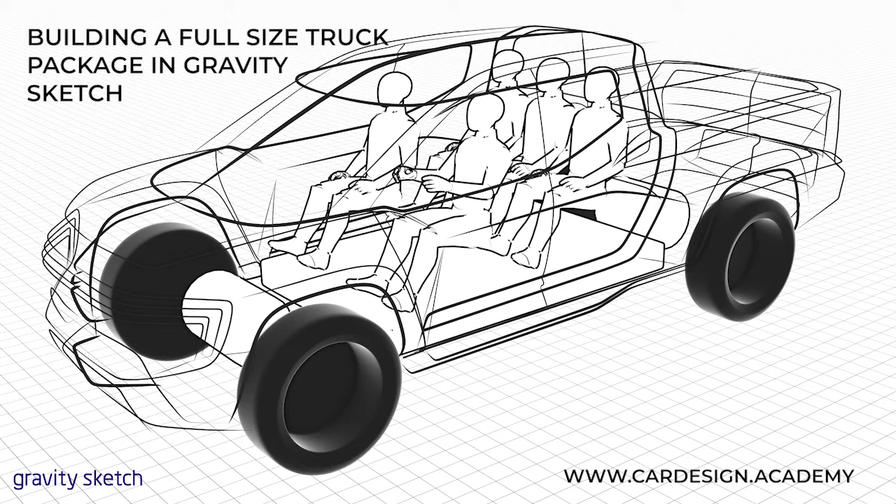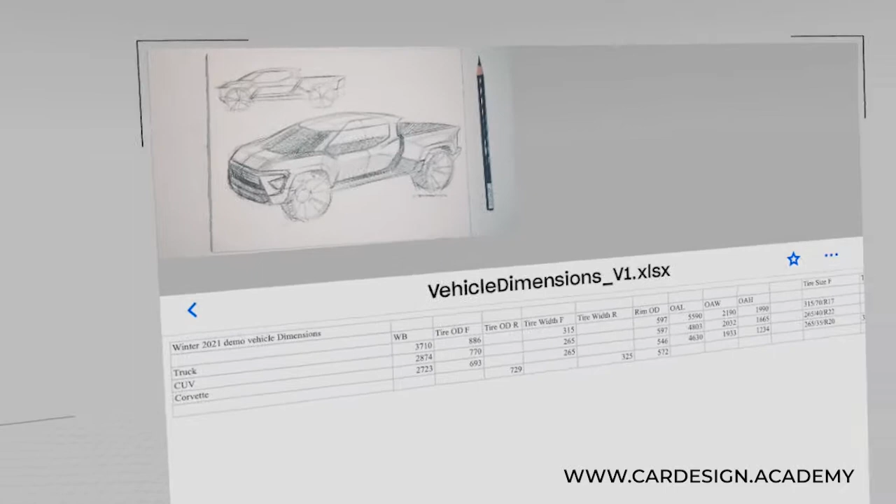In this one, I'm going to be doing this high H-point pickup truck. So what does high H-point mean? H-point is the hip point of the occupant. So for something like a sports car, you have a very low H-point, and for something like a truck, you tend to have a very high H-point. That has a lot of implications into how the occupant is positioned, how they see, what kind of comfort level they have. In the last video, I showed you how to build the sports car package. What I'm going to be doing now is showing you the truck package.

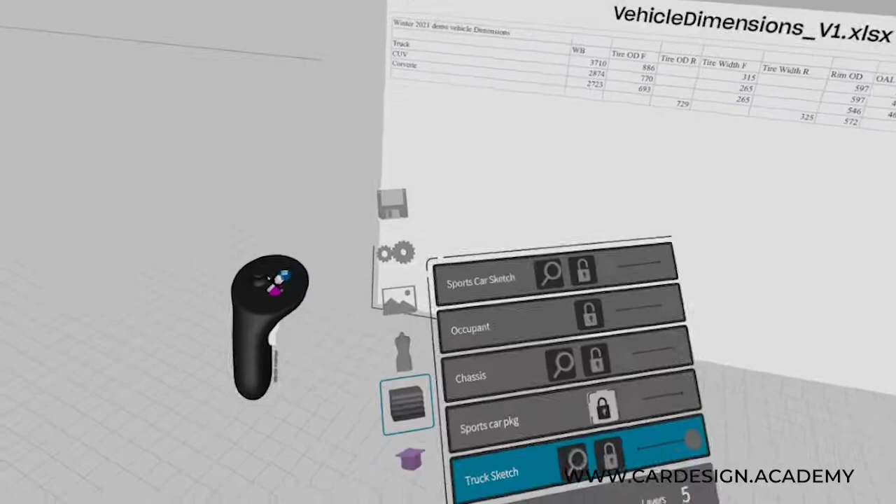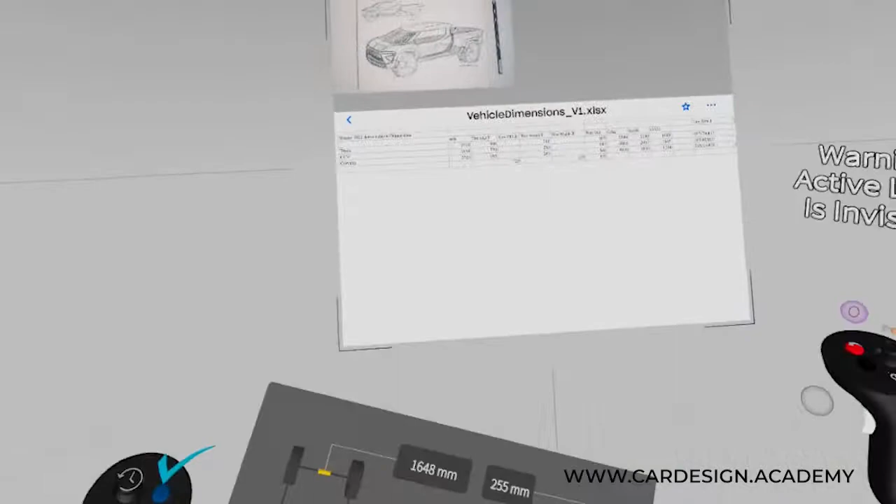So as before, I'm going to be working off of some published dimensions of a comparable full-size truck, the Ford F-150, and then I'm going to be using the rigged chassis tool. So let's turn that on. So we're going to be using the rigged chassis tool to define the dimensions of that vehicle. So we're just going to be using the numerical entries here. So for the truck, we're going to have a wheelbase of 3710.

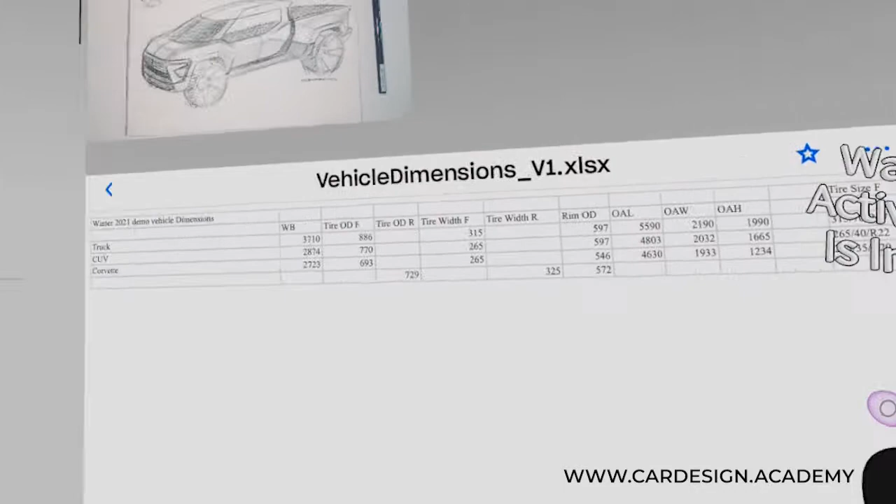We're going to have an overall width of 2190 minus a tire width of 315. So let's just round that to 300. 2190 minus 300, let's call that 1900. So 1900 is our track. And then we're going to get into our tire size, 315/70 R17.

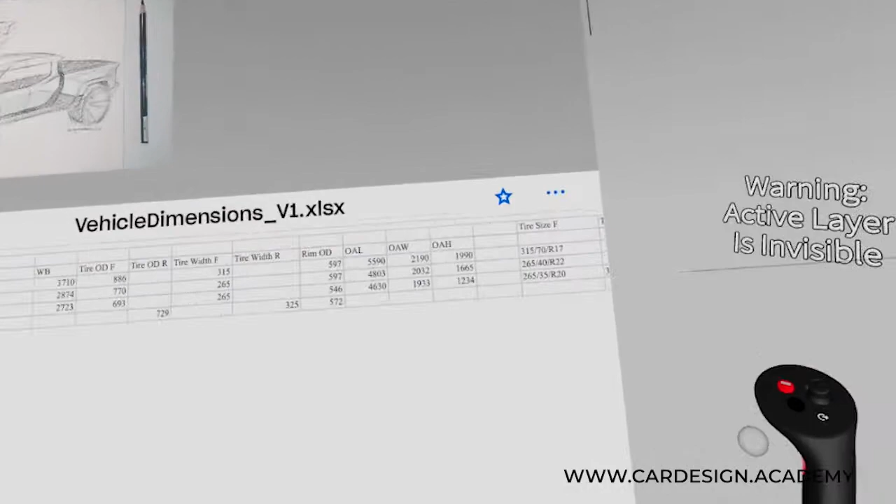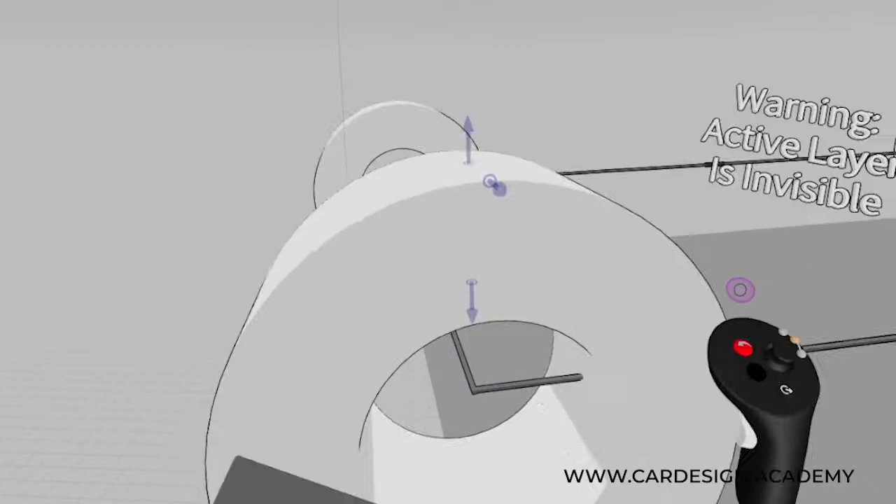So 315, 70, R17. Those are Ford F-150 Raptor tires and wheels. I'm going to bump the rim size out to something bigger, because this is going to be more of an everyday truck. So now we have a correct set of wheels and tires, correctly dimensioned for a full-size truck.

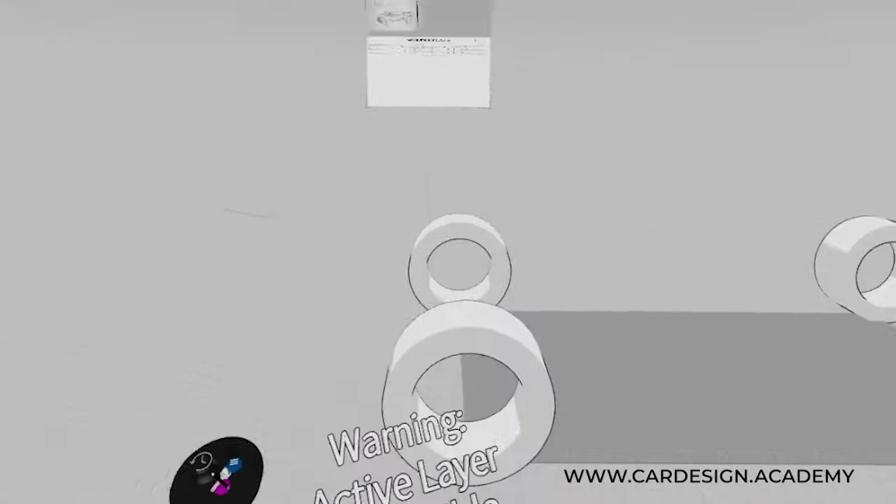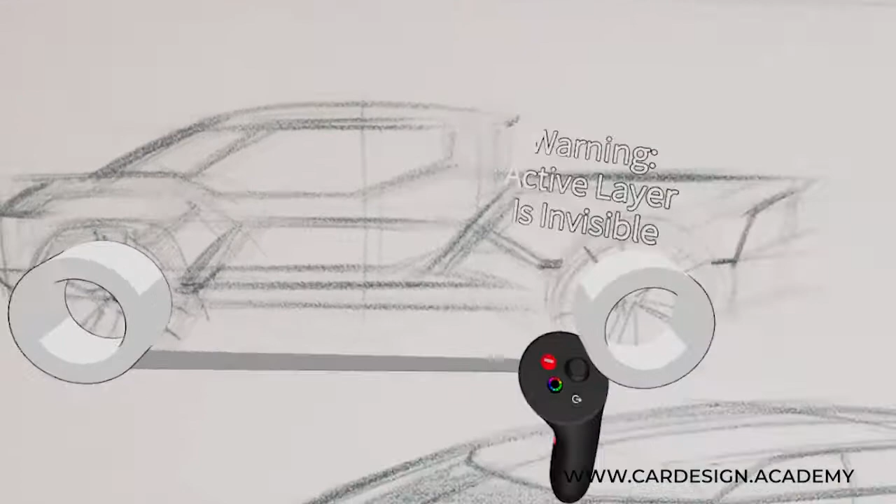Next thing we're going to do is grab the sketch. I'm going to scale it up, and you can see that there's a side view in here. I'm going to be using this side view pencil sketch as my starting point. So what I'm going to do is scale that up to match the positioning of the tires as best I can. And then using Smart Move, I'm going to slide it over to the center plane. I have it on a layer called Truck Sketch. So I'm gonna just turn the opacity down.

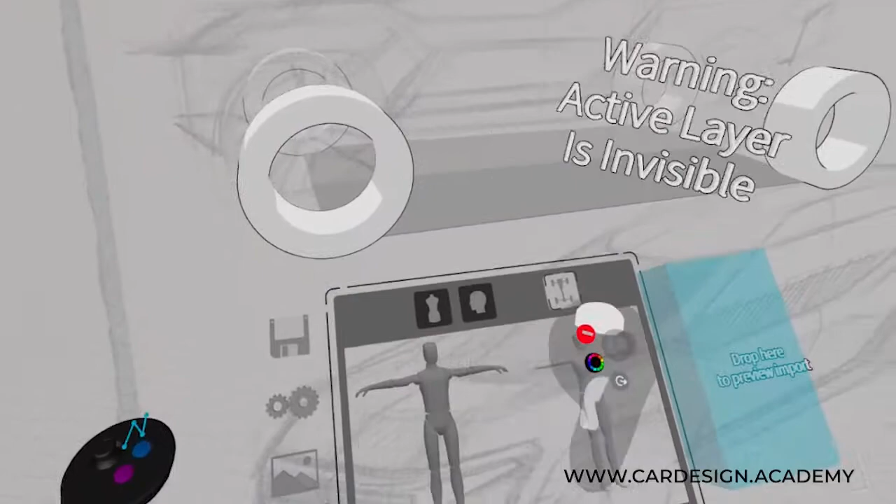Next thing I'm gonna do is place my occupant. Now this is a high H-point vehicle, which means this occupant's gonna be sitting higher off the ground, and he's going to be sitting in a more upright position than a sports car. So I'm going to grab the full-size male mannequin. Oh yeah, I need to go to the occupant layer. We have our full-size man. You can see he's not even standing as tall as the truck. That's how big this thing is.

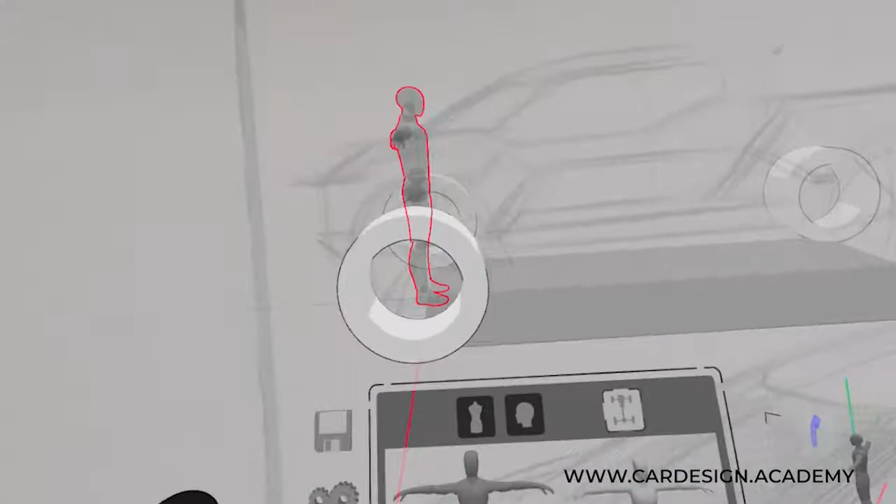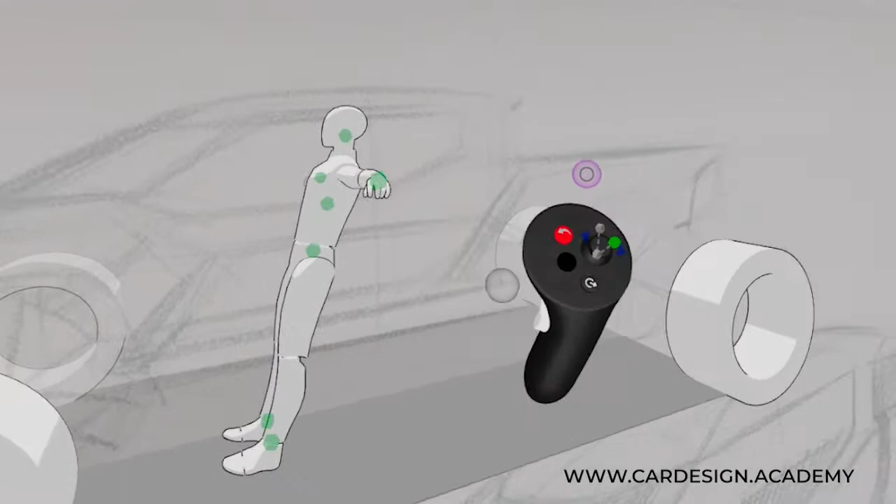I'm going to turn him around, hit the check box. I'm going to give him the white toon shader, and I'm going to start to position him. I'm going to tilt him back just a little bit, but his H-point is going to be quite high off the ground. So I'm going to turn on my control points, slide it using the thumb joystick on the right side. Notch that over. I can have much more control over the positioning of this occupant. So I'm just going to grab the legs. He's just going to be sitting in a very nice, comfortable, upright driving position.

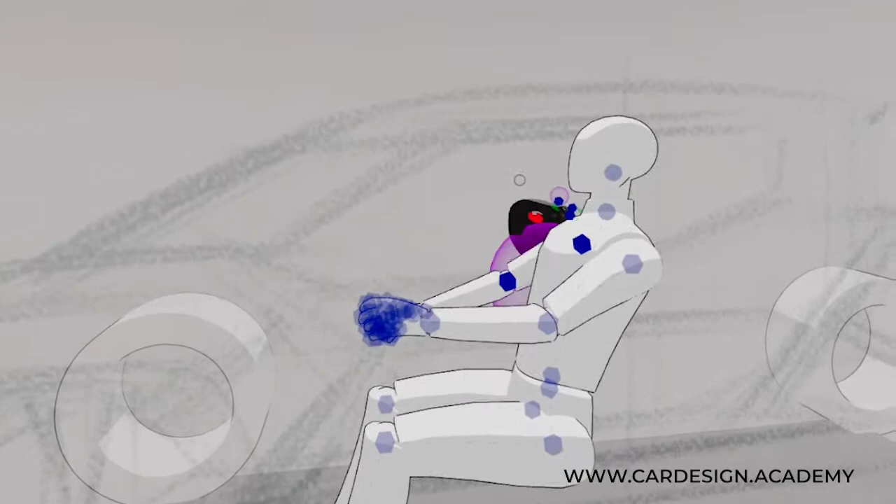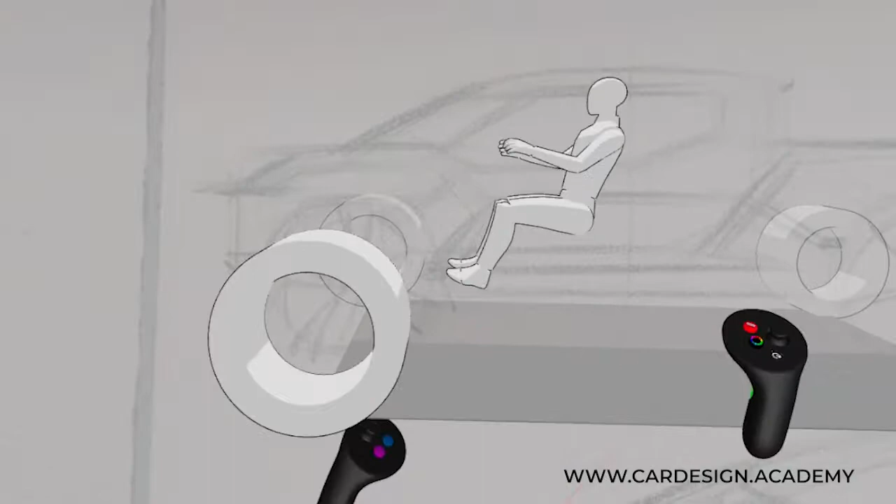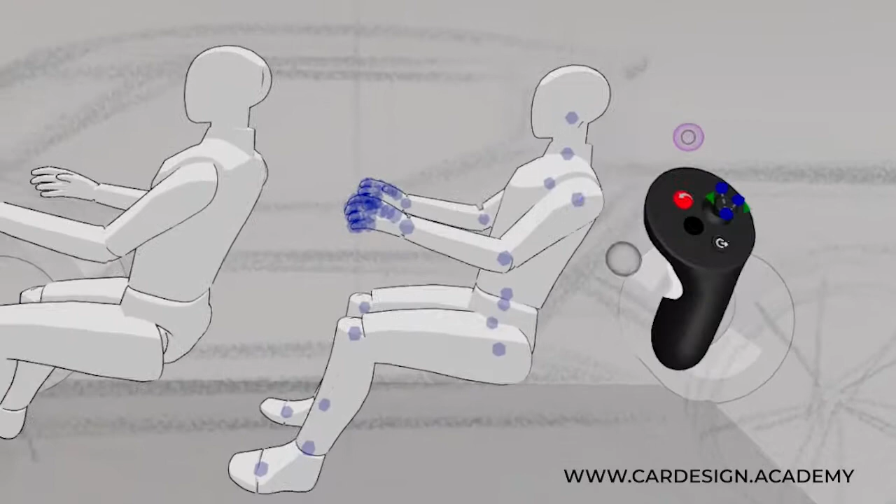So hands are going to be at about elbow level versus the sports car, which is more at shoulder level. Hands are typically placed about shoulder width for a steering wheel. And I'm also going to duplicate him because we're going to have a rear occupant as well. Send him back. As you can see, a full-size pickup truck is quite roomy when it comes to the interior space. Since this occupant is not driving, I'm going to just drop his hands down to his lap.

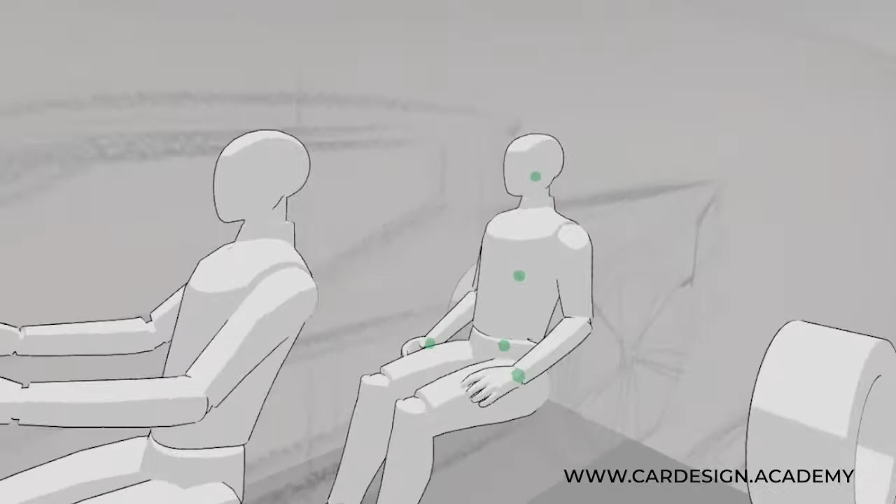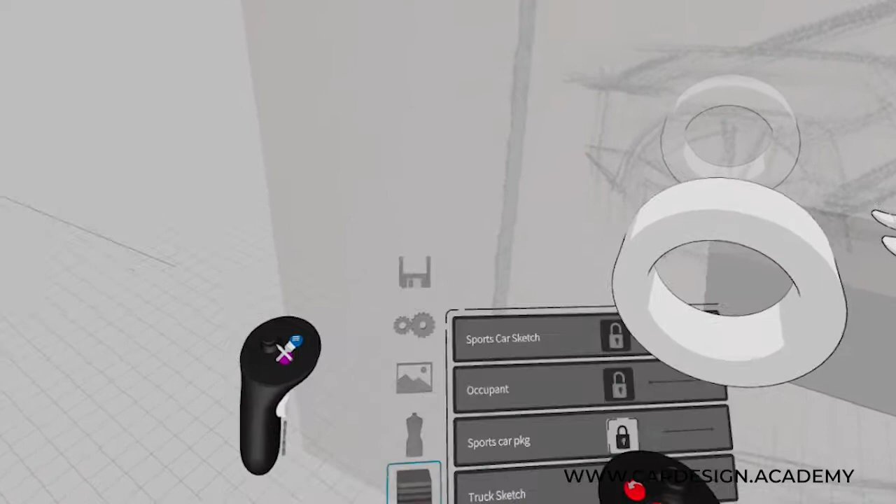So that's a pretty generous package for a full-size truck. So the next thing I'm going to do is draw the main theme lines. So using my ink tool, I'm going to switch to a matte black brush, and I'm going to be setting my brush to planar. As you can see, my control plane is here.

It's kind of off center here. I'm just going to grab it with my left trigger, kind of pulling it. If I pull it kind of halfway, you can see it snaps to an axis. And when that vertical axis is green, it means it's aligned to the vertical plane. So then I'm just going to move it towards the center plane, and it snaps itself to the center plane. So now I can draw.

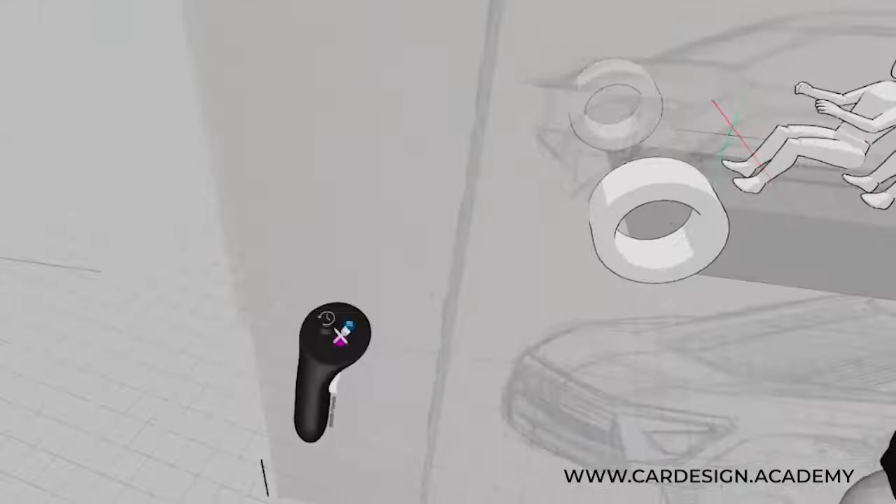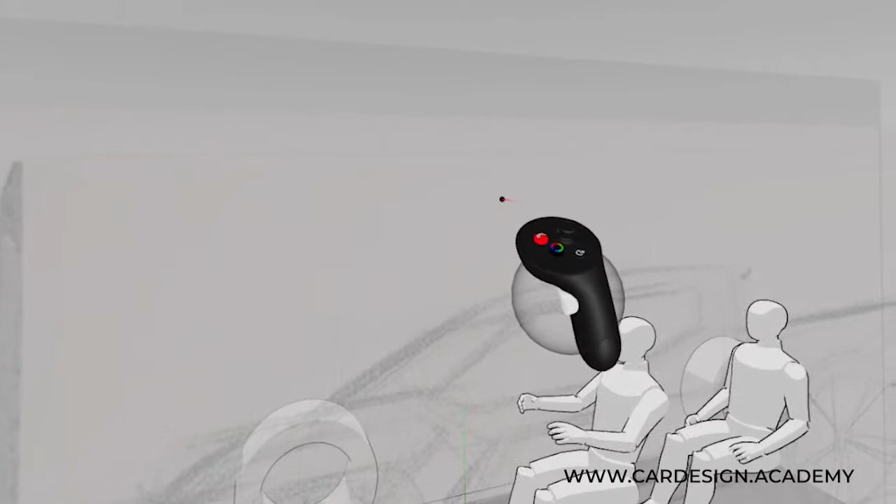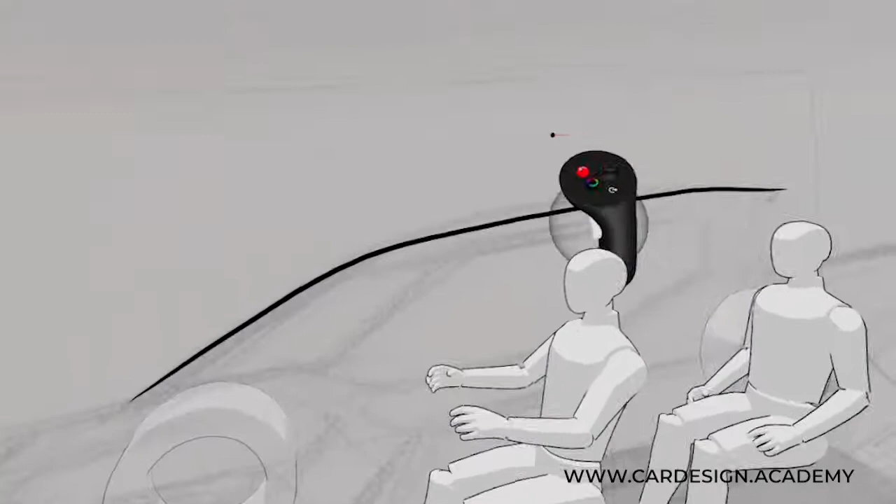Hang on, let me just lock my truck sketch layer. Okay, so now I have a nice ink-like sketch line. I'm just going to use the thumb joystick to adjust the weight of that line a little bit. So then I just go ahead and start drawing the center line. You can see it's quite messy, so I use the Simplify Points tool, and I just adjust the points to get a nice smooth line.

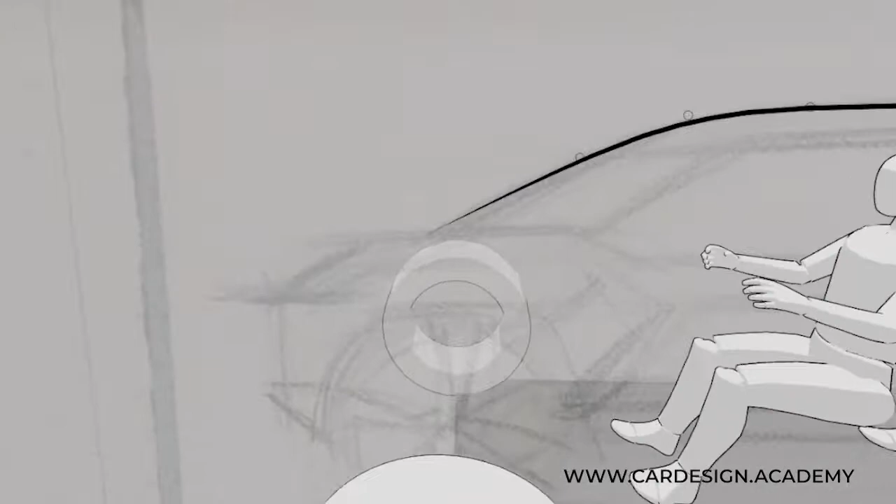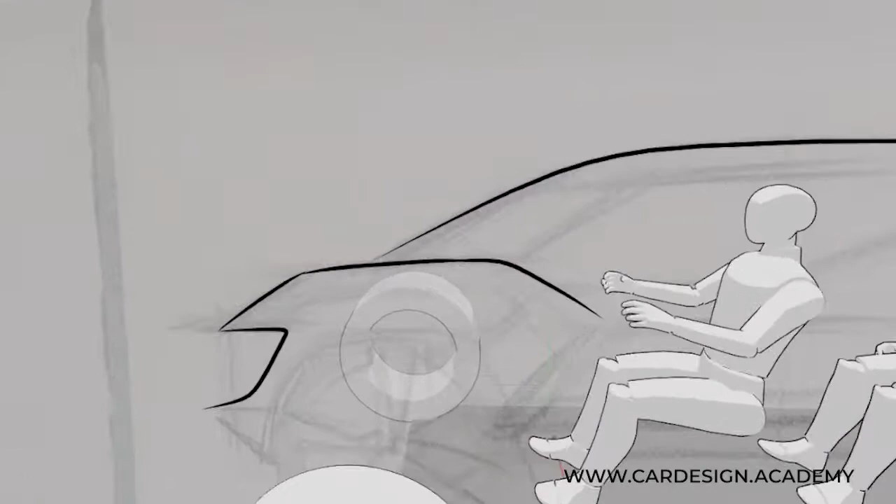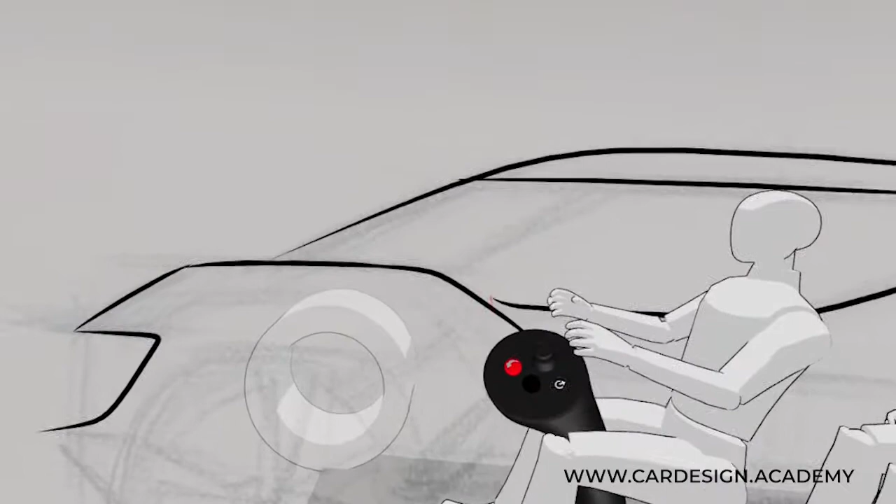This is very much like what we used to do back in the day when I was learning. We did this using rolls of black tape on this plastic film called Mylar, and we would draw these full size on the wall in the studio to give the engineers an idea of how our design concept would fit on the package. So what we're doing now is we've established a package, and now we're starting to lay out those key theme lines on that package.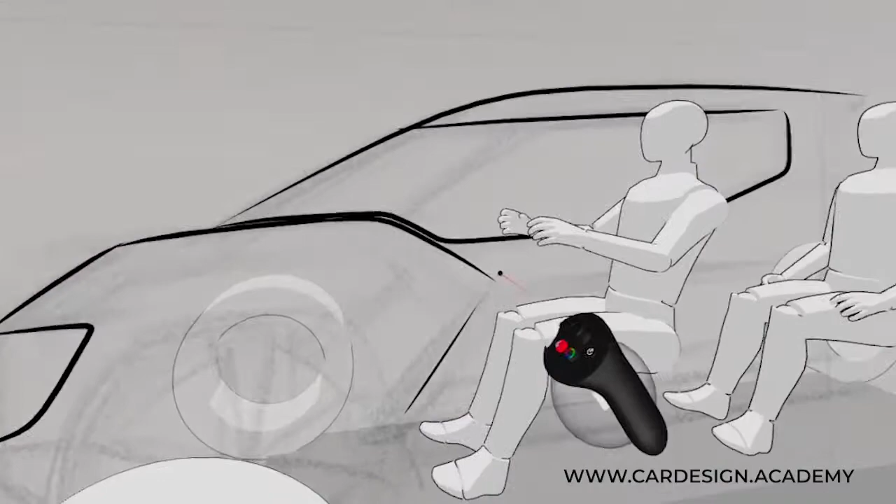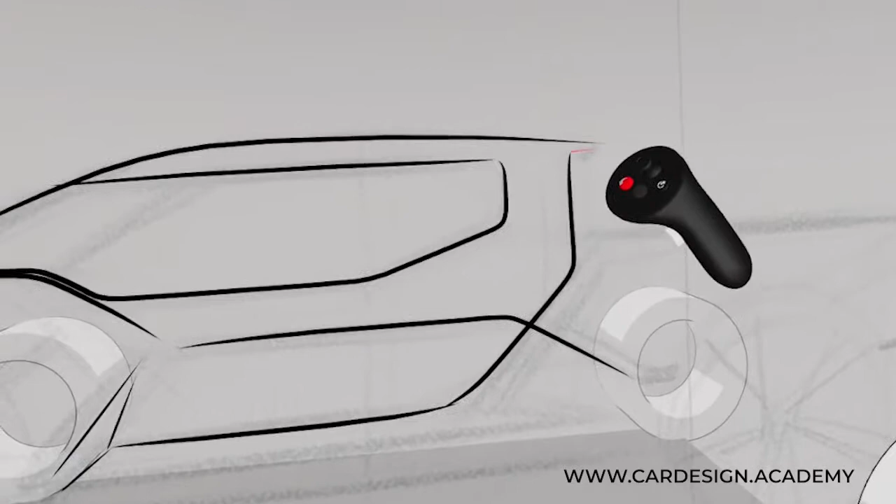I'm going to go ahead and turn the occupants off for a minute so I can concentrate on capturing the main theme lines on this thing.

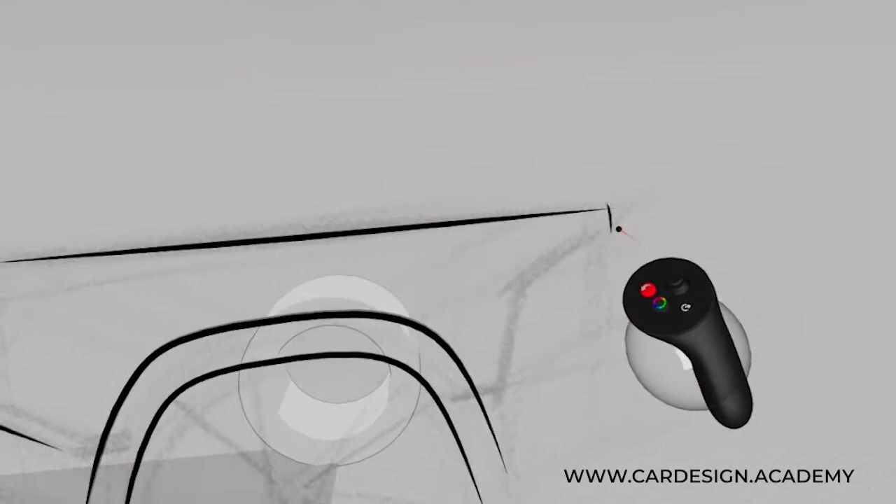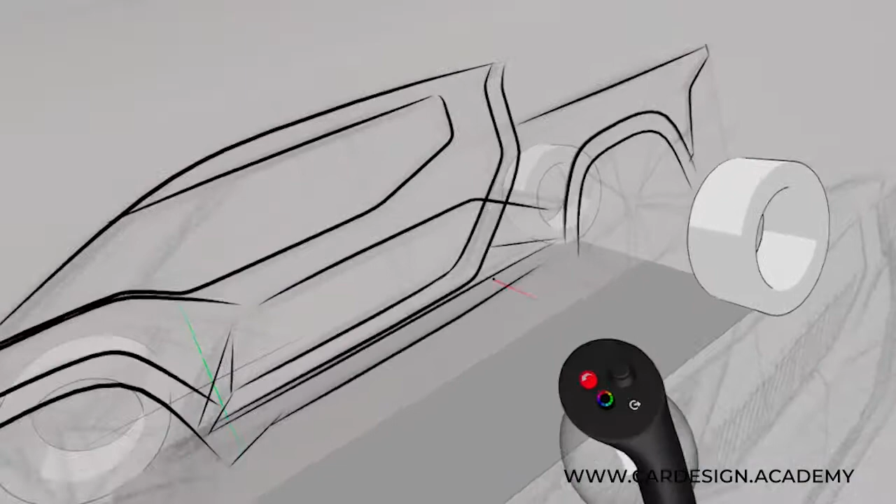These tape drawings used to be very laborious. They're much easier now. This takes minutes, what used to take hours. By the way, you can do this. You don't need Gravity Sketch to do a basic wireframe dimensional drawing. You can use any CAD program.

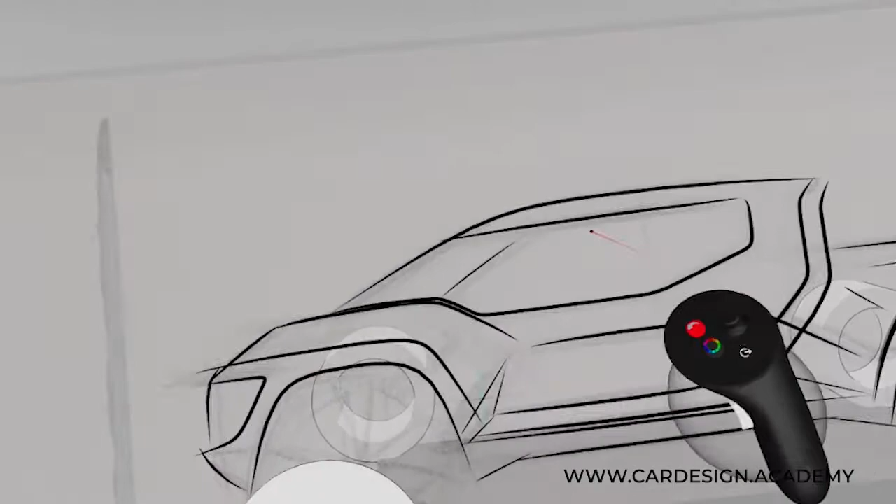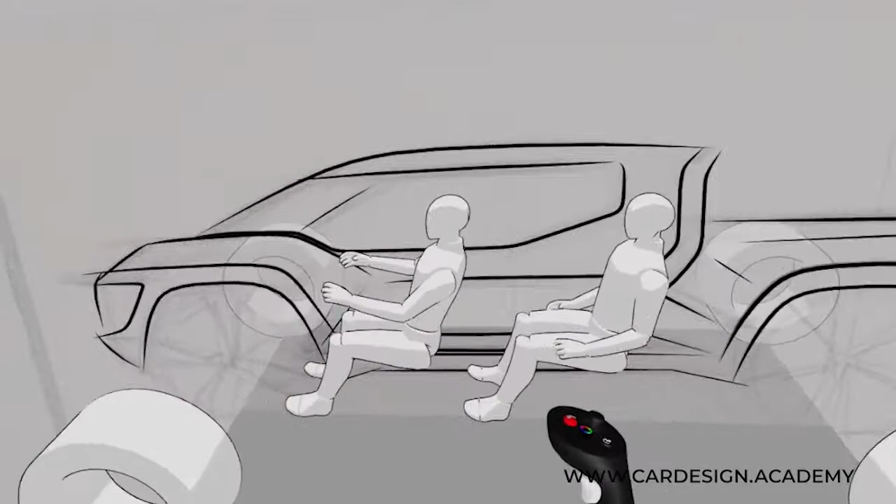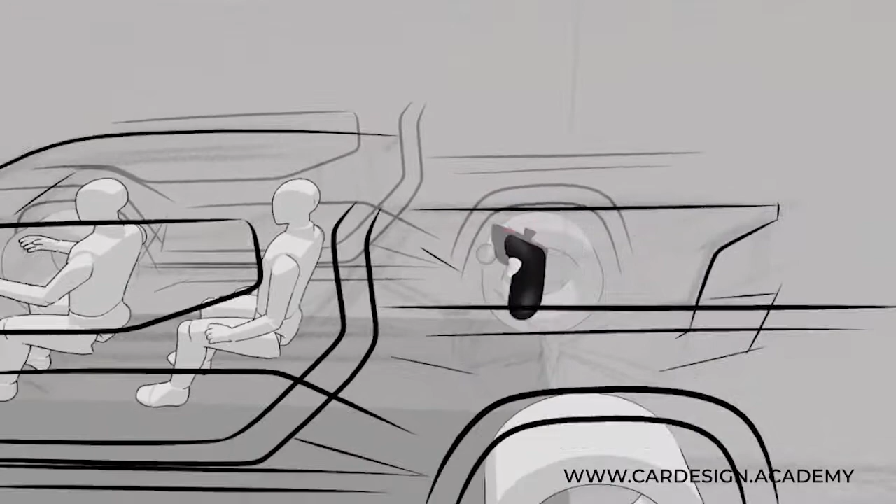Okay, so if we want to start getting some dimension to this thing, let's turn our occupants back on. And we can start to take all of these theme lines and bring them out. And as I move these lines out, they stay planar.

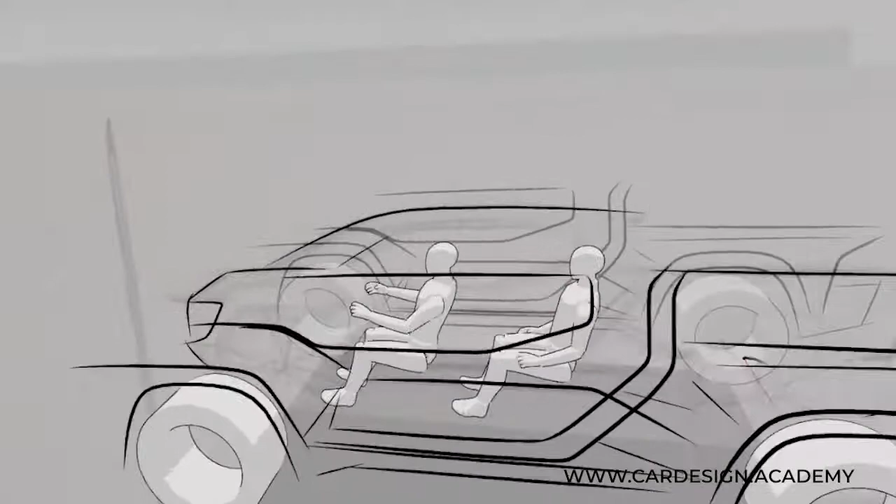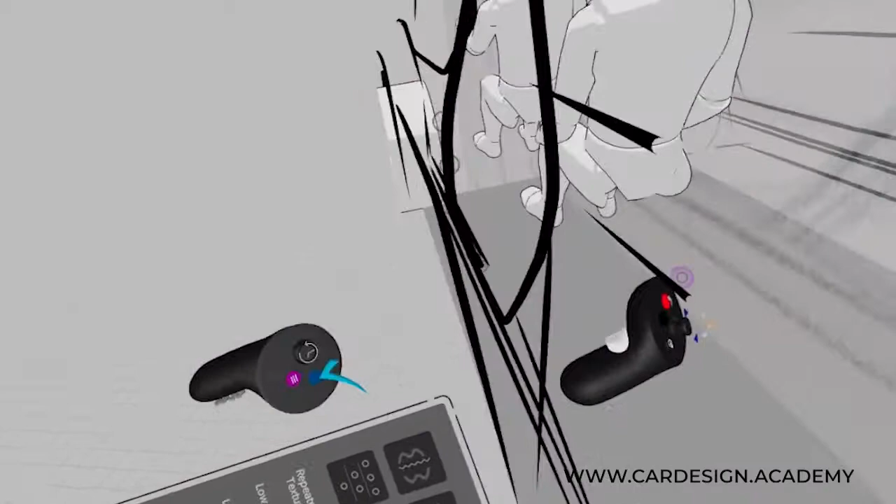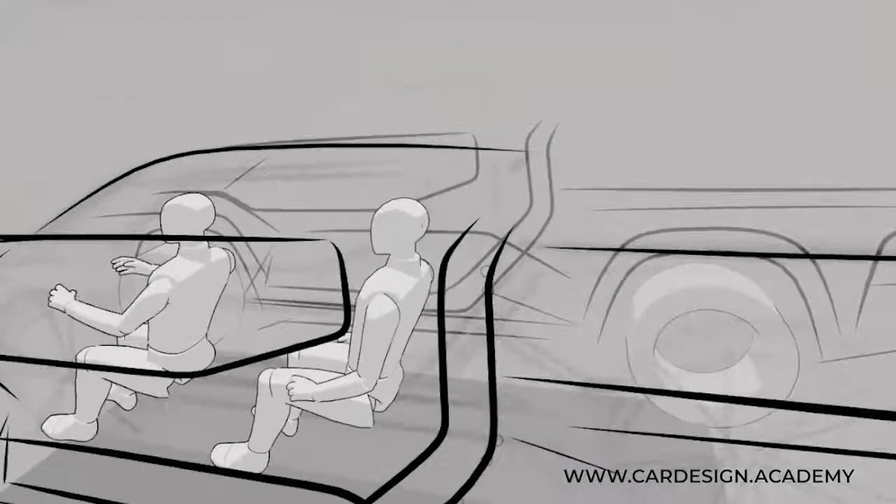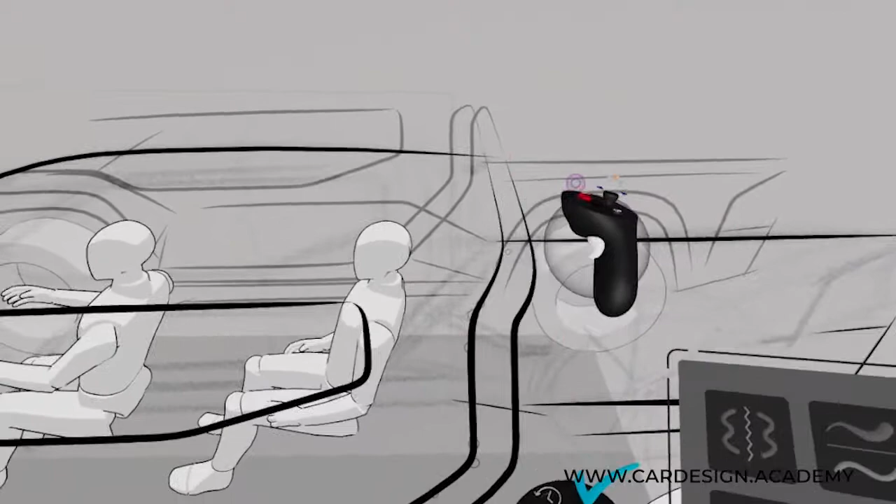However, some of these lines are going to have to move off of the planar lock. So, for example, I'm going to turn off planar on this line, because this is actually a cross section of the cabin. It needs to come out quite a bit. Same with this one. So you can see it's starting to get some dimension. This line especially is going to need to get off of the planar limitations.

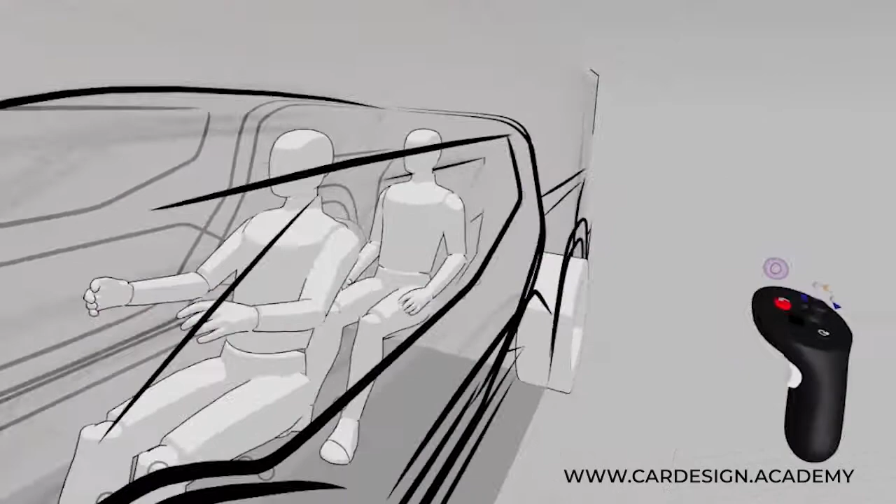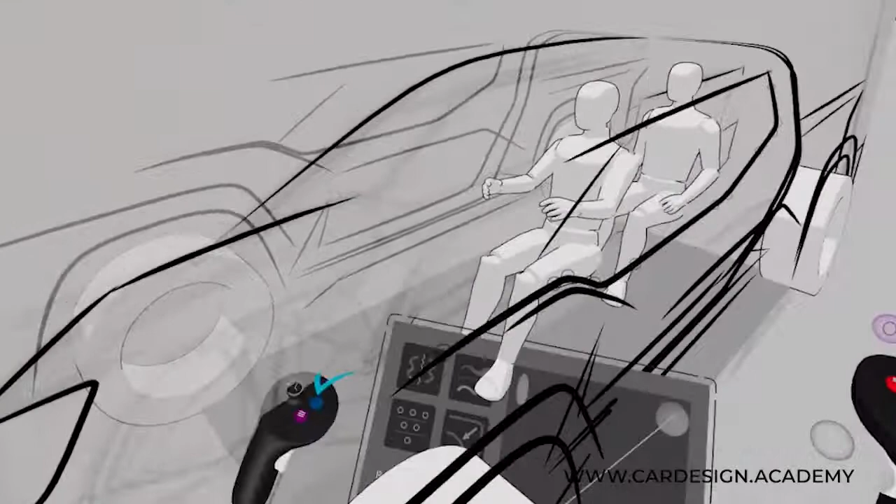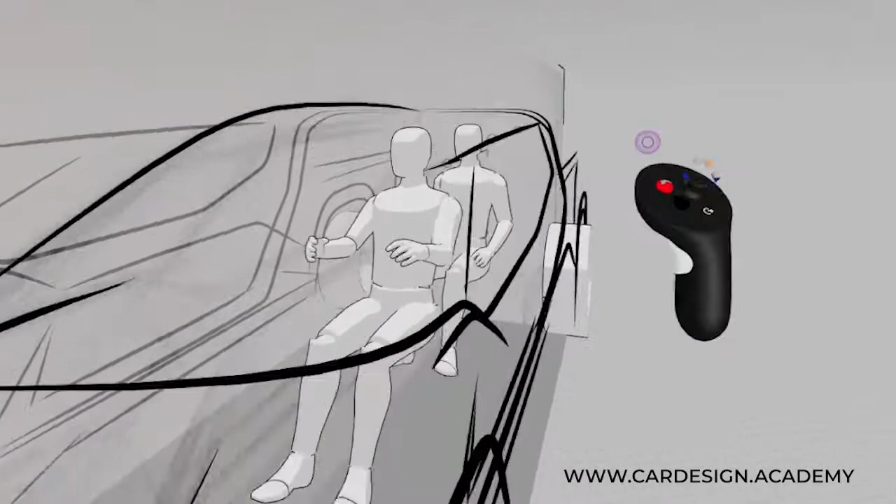So one of the terminologies we use to describe the cabin sort of angling in the end view, we call that tumble home. And something like a sports car will have lots of tumble home, whereas a truck or a van might have far less tumble home. You can see I'm starting to bring some dimension to this thing. Turn off planar with this one.

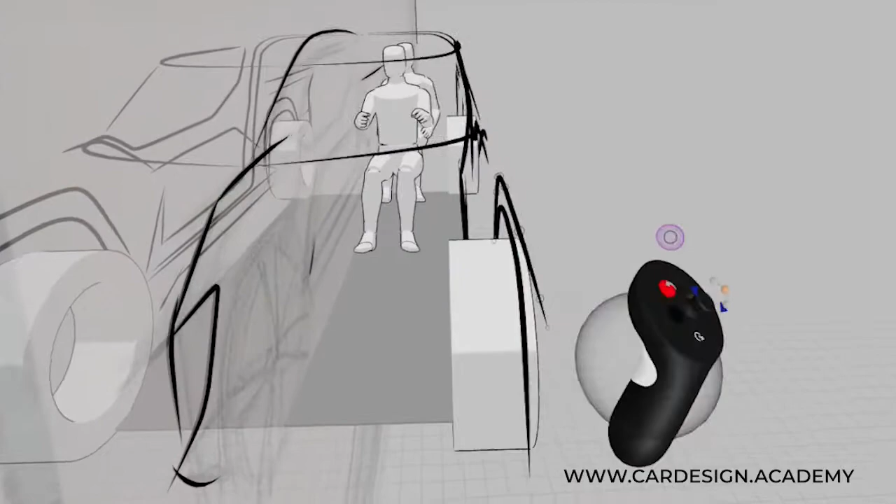And you see very quickly we have a nice, oh yeah, this one's got to get planar turned off. Nice dimensional representation of the theme. And we can take this as far as we want. By the way, if you want to extend a line, you can just grab the point and hold the trigger to extend it.

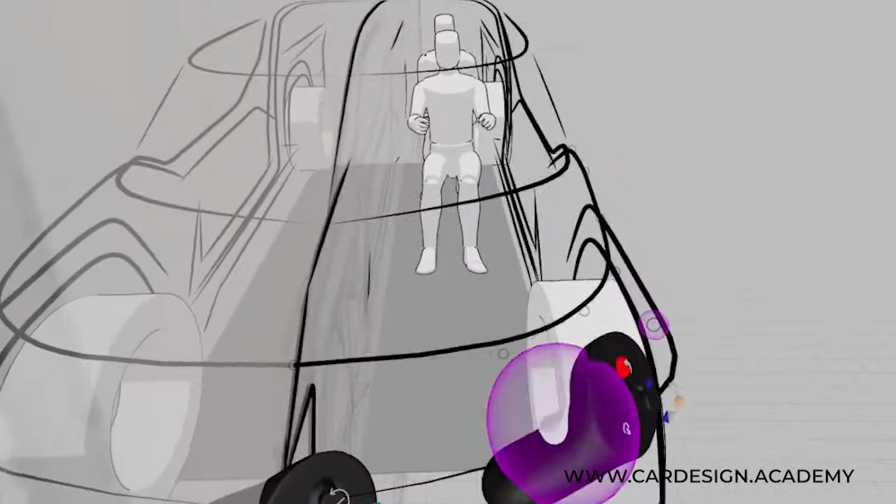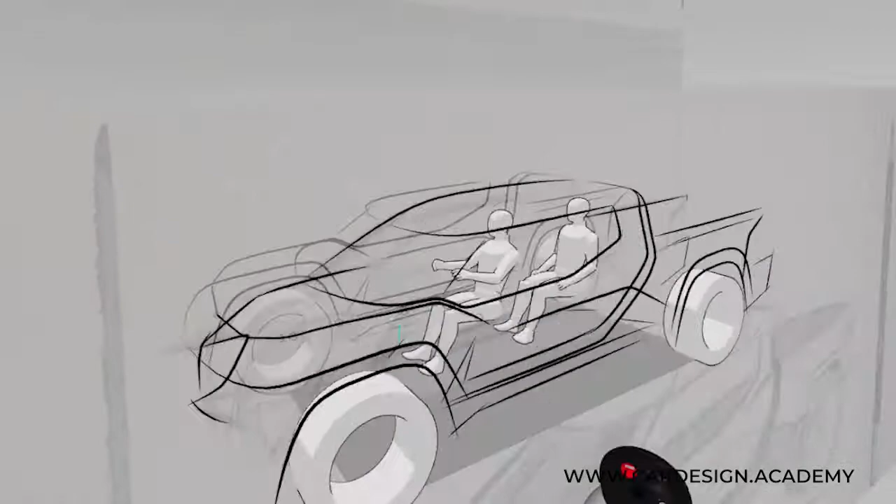You can also add additional points to tighten up the edges. You can see very quickly we're getting some real dimension in this thing. So I've gone through my truck package and I've completed a really nice wireframe. It captures all of the major theme lines, all of the key volumes. I've also added a battery pack and a pair of electric motors.

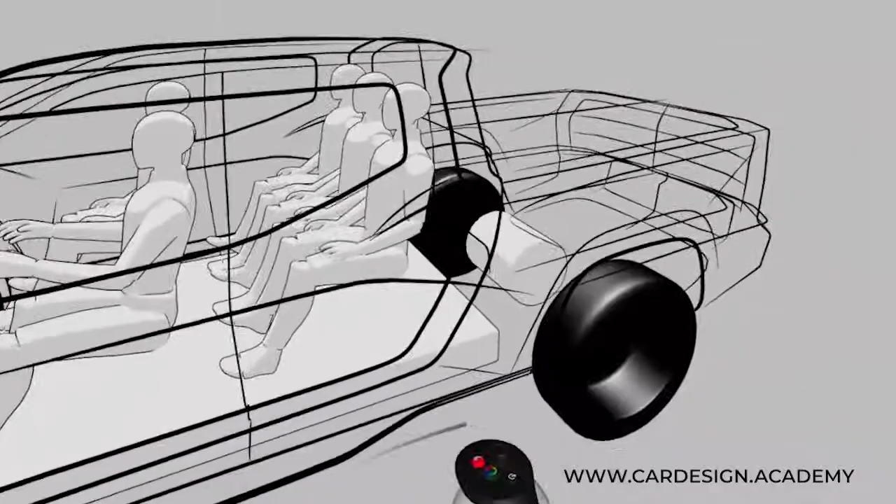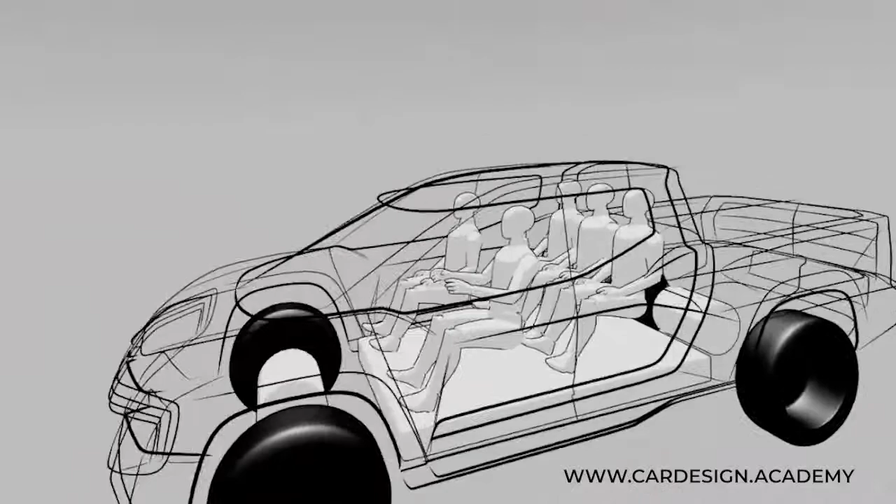Being that this is a high H-point vehicle, we are able to package a pretty substantial battery pack below the floor, which is going to give us lots of range, lots of towing power, lots of hauling power, and so on. So let's talk about some of the key considerations in a high H-point vehicle for the occupants.

Now, again, H-point is measured from the hip of the occupant to the ground. As you can see, this is a very long distance, a very high H-point. This is going to give him a commanding view of the road. So he's going to have a nice downward vision line.

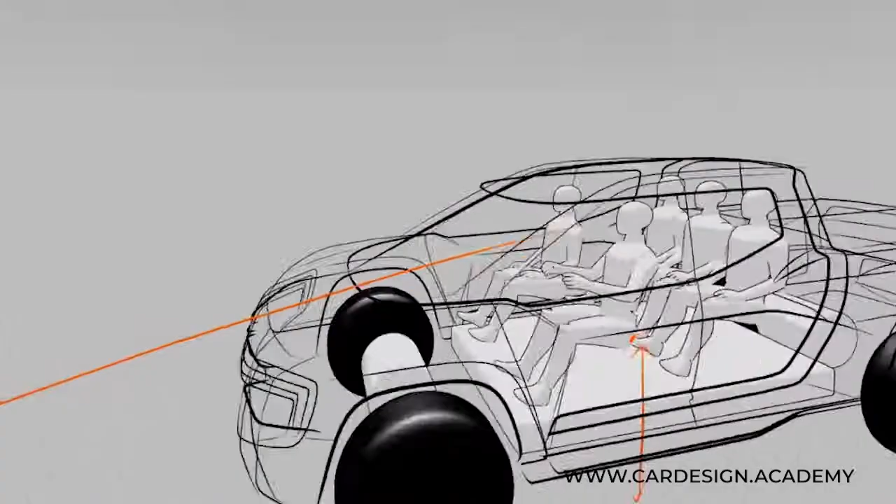He's going to have to clear that hood, but he's going to have a very nice commanding downward vision. Okay. So let's talk about some other key dimensions. Let's talk about hip to heel. So hip to heel is the height between the occupant's hip position and their heel position, the vertical dimension.

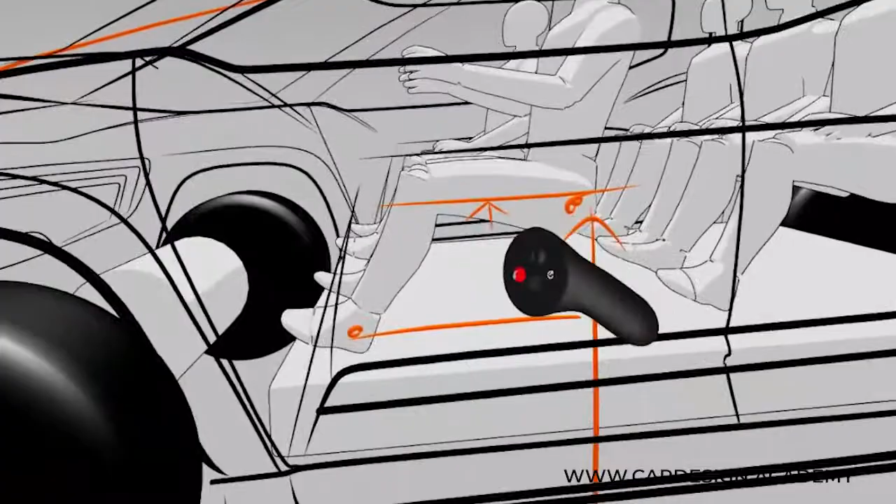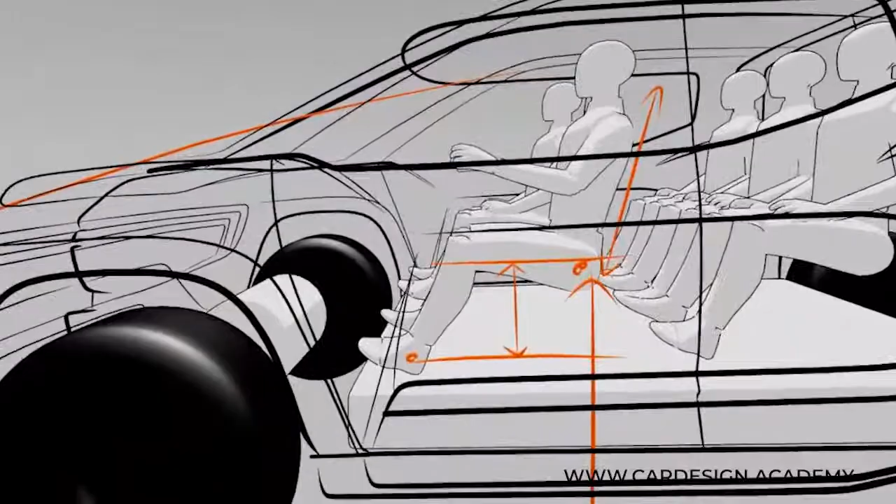A high hip to heel is common in a high H-point vehicle. So that indicates that the person is sitting quite upright. Same thing with the back angle. The back angle is quite upright. It's not leaned back too far, but very comfortable. So this is a very comfortable, upright, commanding seating position.

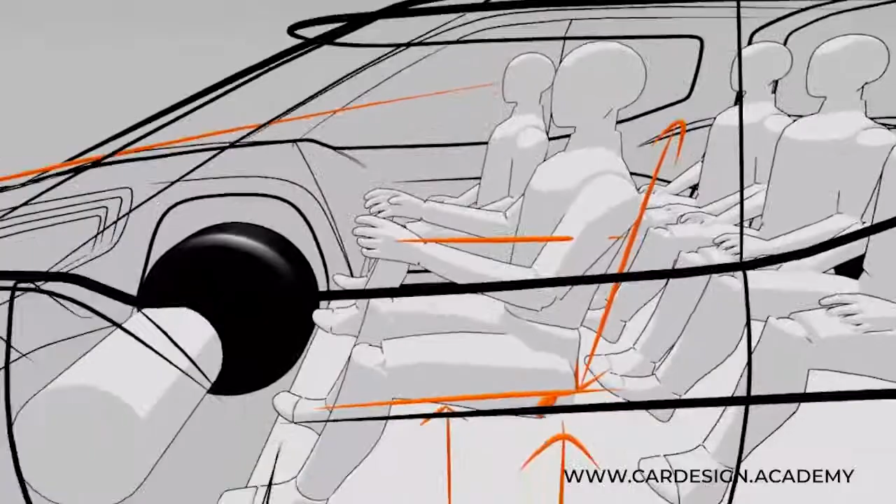You'll also see that his hands are sort of aligned with sort of midway through the upper arm, not all the way with the shoulder, like the sports car. So his arms are in a more relaxed position, and he's sitting quite upright. Again, we have to consider leg swing. So in the case of a full-size truck, the occupants are spread quite a bit apart.

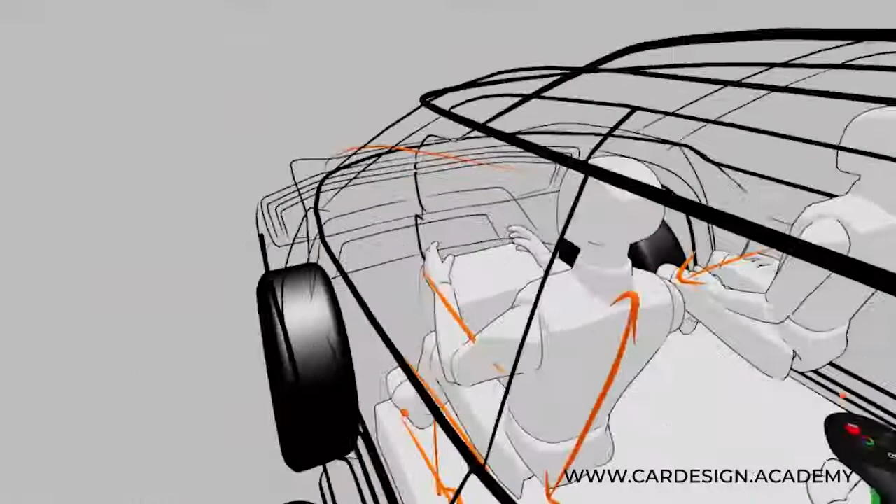Now this is another key dimension I didn't cover in the sports car. This is called couple distance. Couple distance is the distance between the right and the left occupants. And a large pickup truck typically has a big couple distance, oftentimes to be able to even package a third occupant in the middle. So that being said, it also enables a really wide interior. It also minimizes leg swing.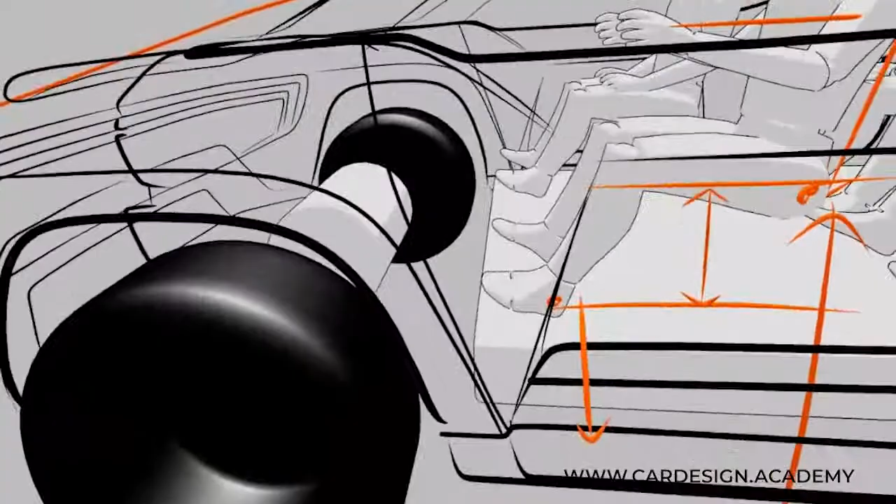So he only has to get his leg over a short distance, getting in and out, in order to reach the footboard here. Also, you can see he can easily swing his foot around the front wheel. He's not too far forward. We could probably position him a little further forward, but as you can see, the rear occupants already have a ton of leg room.

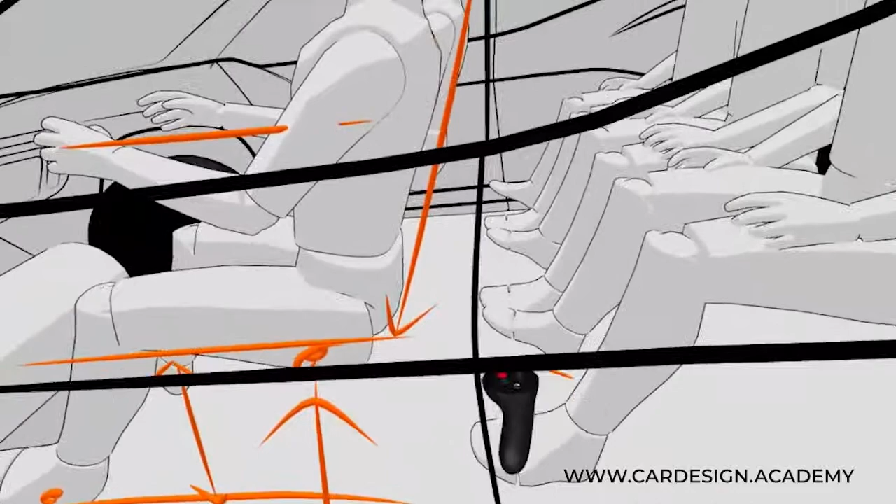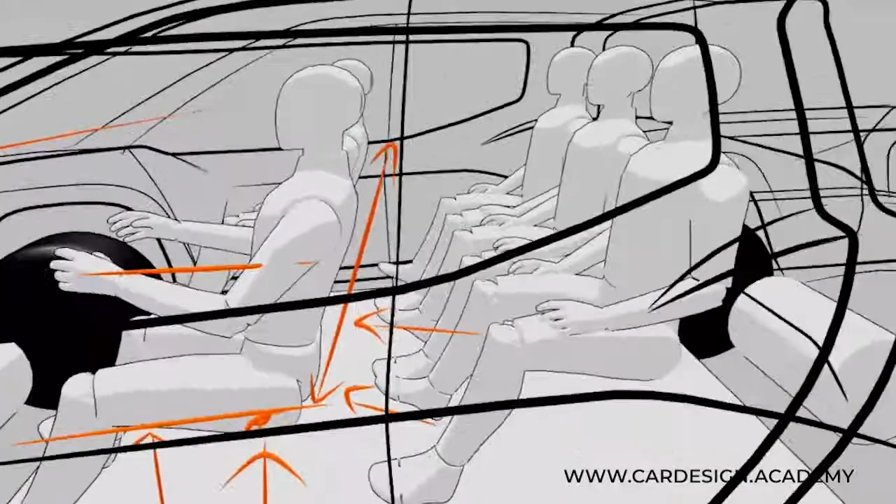As far as rear occupants go, we have to consider leg room, the distance between the knees and the back of the occupant. Typically in a large vehicle, it's a very generous dimension. We can also look at things like theater seating. So you can see the rear occupant's head is slightly higher than the front occupants, so they can see over the occupants a little bit. And so these are the characteristics of a high H-point vehicle.

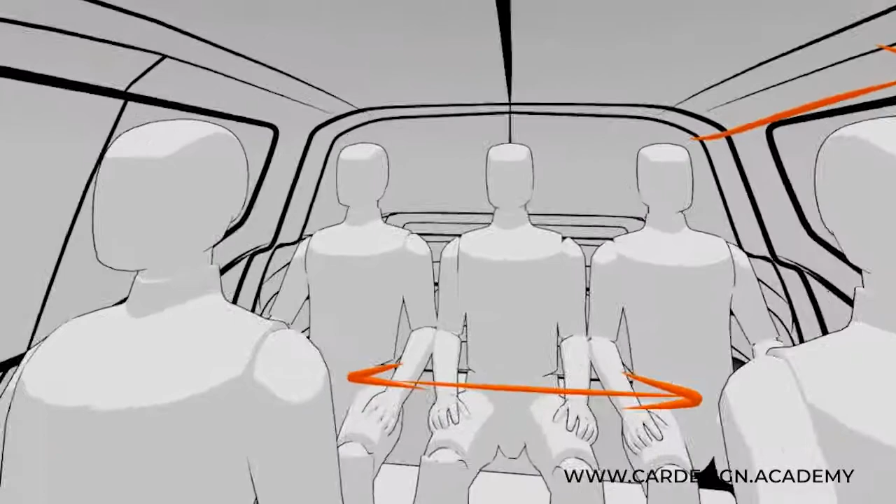So when you're inside the vehicle, you can see it's going to be a very open and generous package. This is one of the great things of Gravity Sketch, just being able to see and experience the scale of things. That's something that was never possible in a traditional CAD software. Only in a full-size tape drawing or a full-size seating buck could you hope to experience in 3 dimensions the spaciousness.

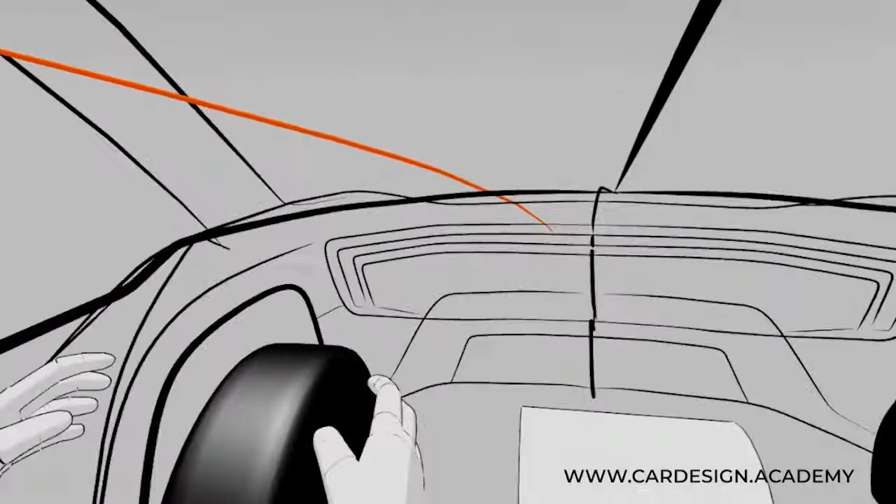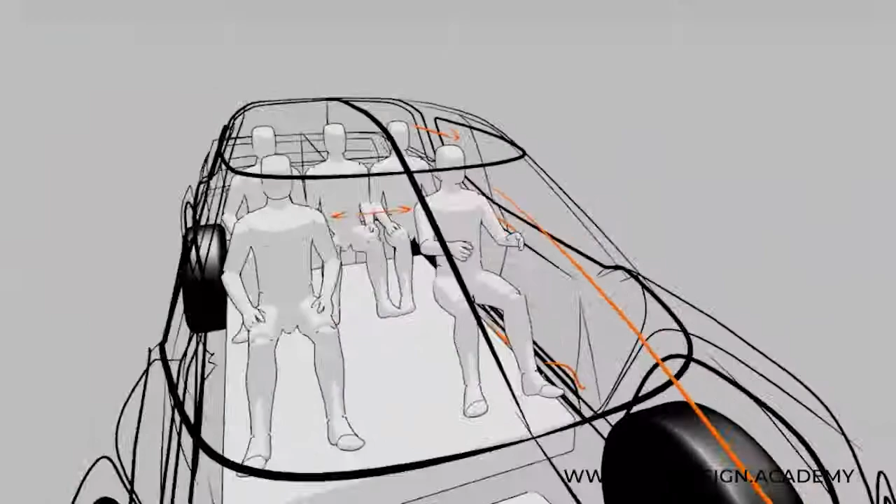So as you can see, this vehicle has a very, very fast windscreen and a very short hood, which means there's a lot of open space here. There's a potential to really use that space in some sort of functional capacity. And let's talk about one more thing: the ingress and egress. Remember, we talked about in the sports car the ingress targets.

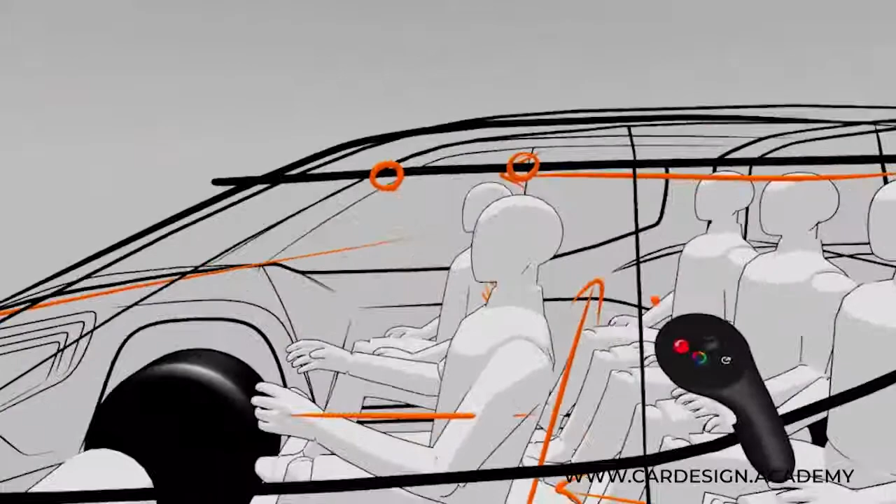As you can see here, the ingress, the top of the window is quite high, so it's going to be very easy for this occupant to get in and out of the vehicle without bumping their heads. This is a very, very open, generous, large scale package, as opposed to the sports car, which is really shrink wrapping the body to the occupant as tightly as humanly possible.

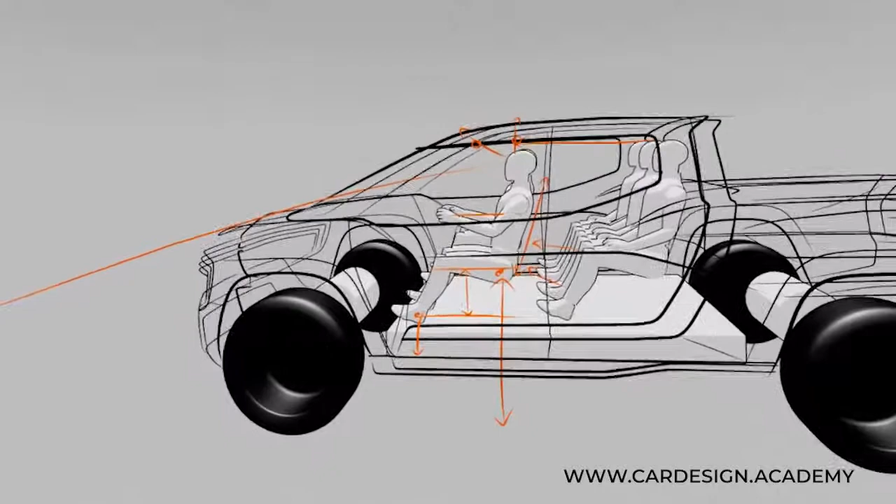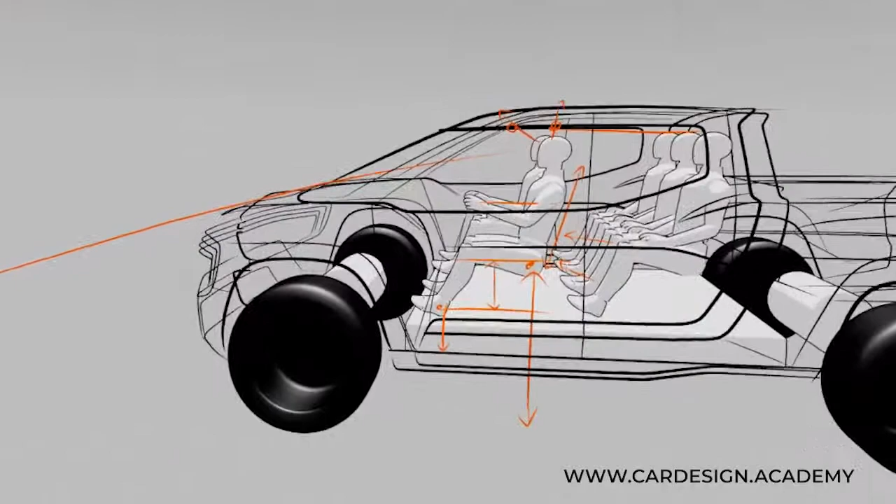So these are the key considerations when you're putting together a vehicle package. Think about your target user. Think about the needs and wants with regards to interior accommodation versus exterior silhouette. And today you've been able to see the contrast between a very functional silhouette with a very accommodating interior versus a very sleek, dynamic sports car which has got a very tight interior.